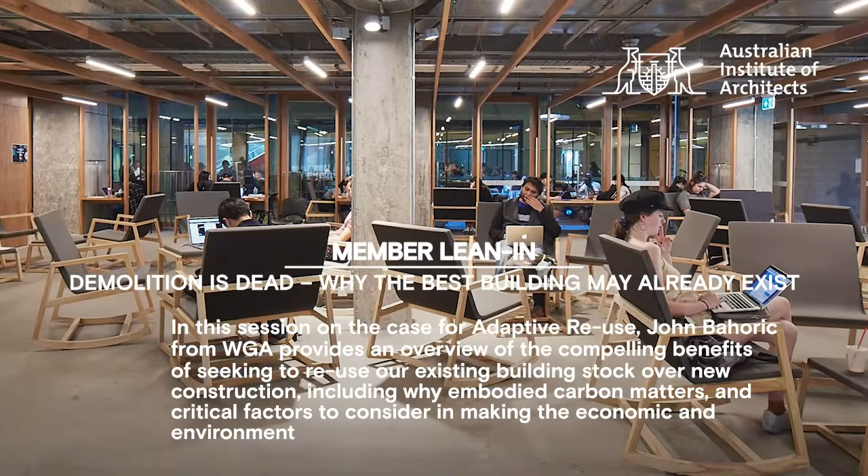This session will provide an overview of the compelling benefits of seeking to reuse our existing building stock over new construction, including why embodied carbon matters and critical factors to consider in making the economic and environmental case for adaptive reuse. My name is Stephanie Bullock, and I'm from Kosloff Architecture and sit on the Institute's Victorian Chapter Council, and it's my honour to be your host and moderator for today's lean-in session.

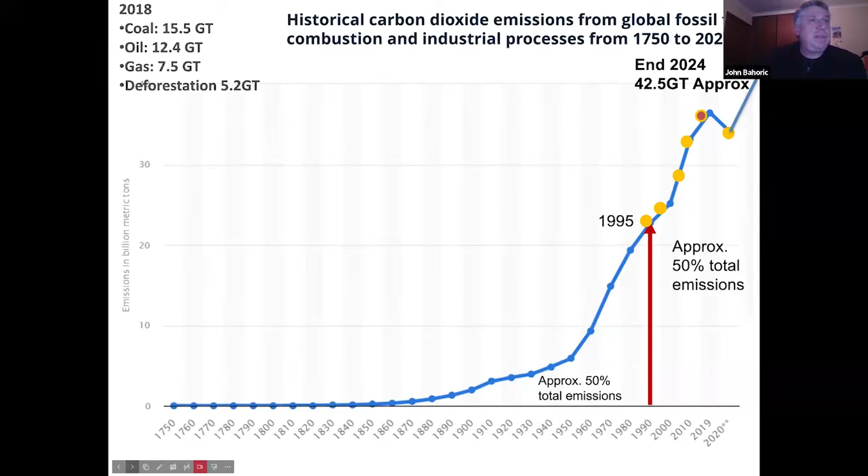Yep, just keep on going. That's it. Next slide.

The reason why we're here talking about this is because if you look at global CO2 emissions, buildings make up about 39% of emissions, together with transportation about 23%. In the building sector, we're responsible for about 39% of emissions, about a quarter of which is attributable to embodied carbon, about 11%. So the decisions we make as designers are very critical in our ability to influence and reduce both operational and, in particular moving forward as we decarbonise the grid, embodied carbon.

There's a couple of other points that tie together neatly which we should be cognizant of. Resources will become difficult to extract. It's predicted that we'll have a resource shortage as our building stock effectively doubles in the next 40 years, and the cost of resources will concurrently increase with material demand, which will outstrip supply. And as we decarbonise the grid, as solar panels and wind take over from coal, it'll be increasingly embodied carbon that becomes most heavily scrutinised.

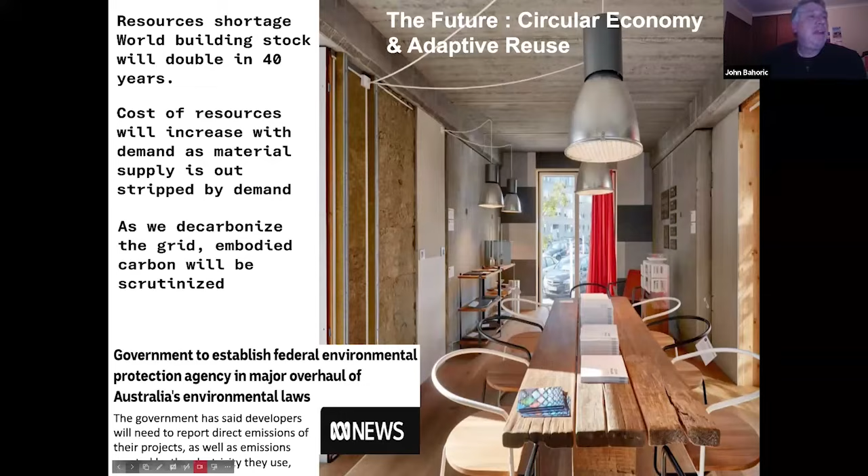If we compare that to France, for example, France have passed a new law that compels developers or builders to effectively have at least 50% of their materiality be regenerative, which basically points to timber as being a major material component for use moving forward through French building stock. So there are definitely compliance requirements now being increasingly implemented across the world, which recognise the dire situation that we're in.

When we talk about emissions, I thought it would be useful to talk about some definitions first. The common language is Scope 1, Scope 2, Scope 3. Scope 1 refers to direct emissions from on-site fuel combustion, gas turbines, machinery, vehicles. Scope 2 refers effectively to electricity, heat, or steam that you buy from the grid. So when we talk about removing Scope 2 emissions, we're effectively talking about decarbonising the grid and shutting down coal-fired power stations, replacing those with wind, solar, or other green sources of power.

Scope 3, and this is what the planning laws will target, refers to products that you buy. It refers to your business travel, when you're on aircraft or aeroplane travel. It also refers to the materials that come out of the ground that are processed, refined, and purchased, including fuel. That forms essentially the embodied carbon that goes into your building. So Scope 3 is essentially the next big component that's being targeted.

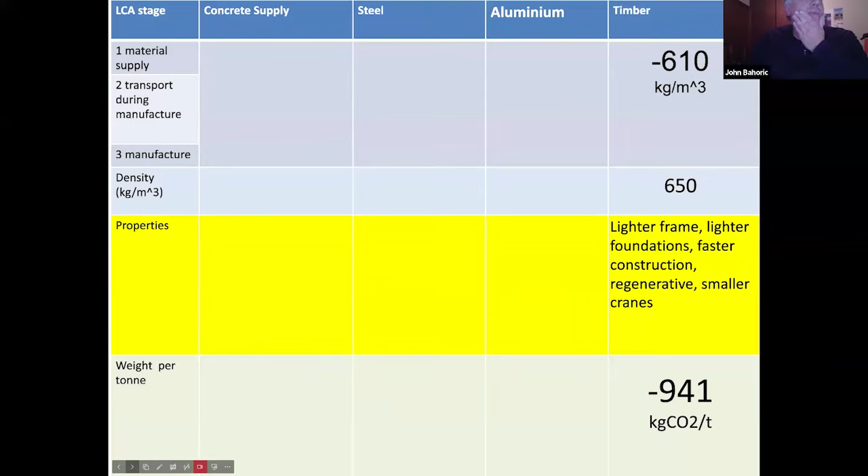Now let's compare that to concrete. Concrete releases 410, for a standard mix, 32 MPa—referred to as the Australian National Life Cycle Inventory Mix, a benchmark. That releases 410 kilograms of CO2 per cubic meter, almost exclusively and entirely in the production of cement. When we produce cement, constituent particles get heated to about 1,500 degrees, and that's where all the energy is released in its production.

Flipping that around, weight per ton, it's about 171 kilograms of CO2 per ton, which isn't too bad, except we use concrete on foundations, floors, columns, beams. It tends to add up because it's omnipresent.

So let's compare that to steel. Steel is horrifically high. If you look at the bottom and compare it to concrete, for every ton of steel we produce, we release 3.2 tons of CO2. That's because steel has to be heated in a blast furnace to about 4,000 to 4,500 degrees centigrade, and that's where all the energy is consumed.

Even recycled steel has to go back into an arc furnace, also up at about 3,500 to 4,000 degrees. The difference between recycled steel and steel that comes out of the ground is essentially that you're removing the mining processes, but it's still very carbon intensive. So using recycled steel isn't necessarily saving the world, unfortunately.

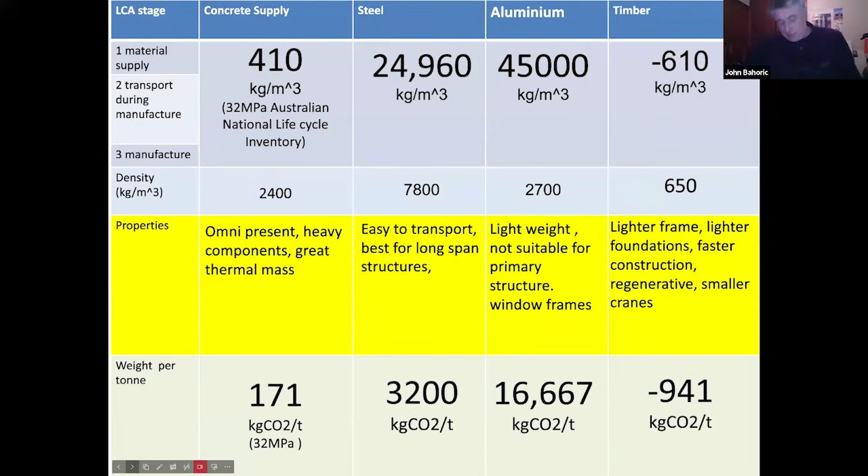Now I want to compare that to some other finished materials you might use. For example, glass is about 1.1 tons of CO2 released per ton of glass produced, and plasterboard is about 169 kilograms of CO2 per ton. It's not too bad, but these materials tend to be used more often as fit-out and become omnipresent.

Compare that to terrazzo tiles, which from memory is 80 kilograms of CO2 per square meter. And the last one is vinyl carpets, which is about 11 kilograms per square meter. So obviously the figures get smaller as the materiality and end use becomes less structural.

But it's more about being cognizant of how often you're using it and how often the cycle of refurbishment and fit-out occurs.

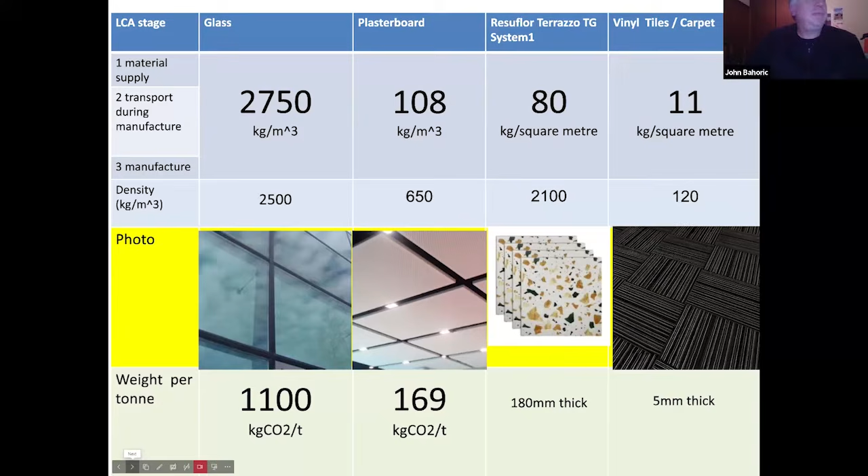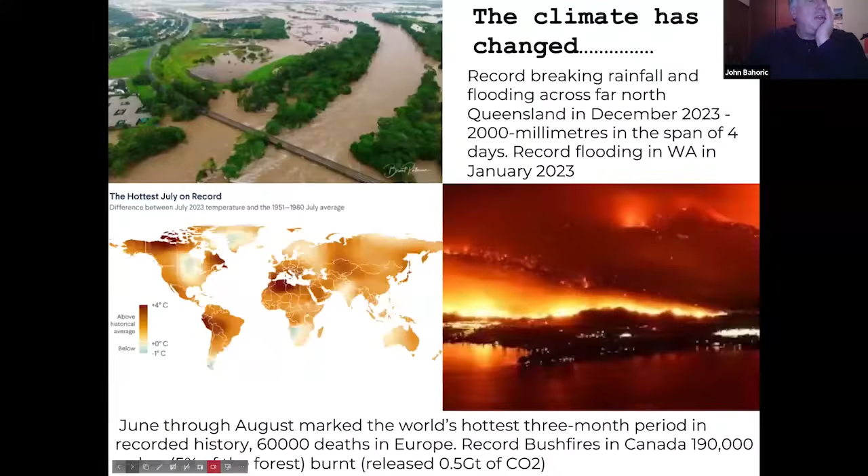Ballarat Biennale building is a 150-year-old building that was essentially a bank. It was the location where gold from Ballarat was brought in and exchanged for money. That meant the building was very resilient and strong. The floors had foundries where gold was melted and ingots created, so we were dealing with robust floors—220 deep, 240 deep joists, 60 wide—giving a floor capacity of about 5 kPa, which is incredibly good.

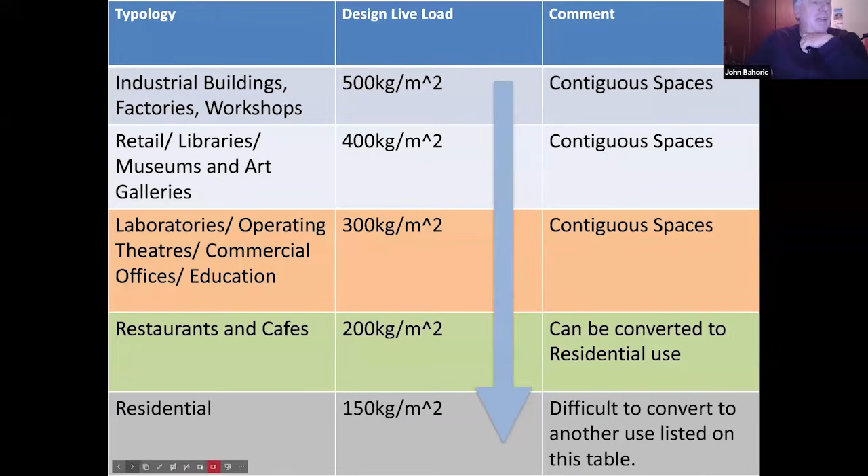For some of the existing long span structures, we had wrought iron girders that were riveted, creating column-free or wall-free spaces. That gave us something interesting to work with in terms of a building that could be fairly readily adapted to a gallery.

Of interest as well were the bluestone foundations. It was difficult to strengthen those to get them up to current earthquake code requirements, so we sought dispensation in that regard.

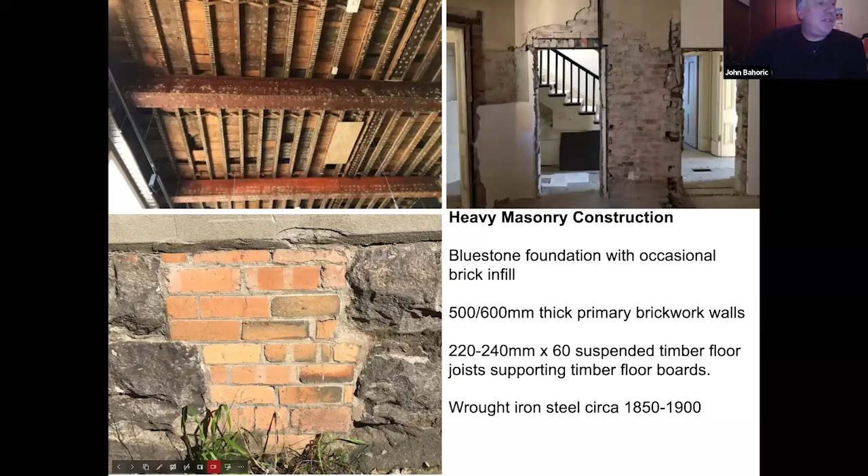This shows essentially what we were dealing with in terms of the composition of the walls. We've got effectively limestone mortar holding together brickwork that was also held by a one centimetre thick, or thereabouts, limestone render. Together, the whole assembly was quite strong, and it gave the building and the walls a lot of resilience.

But the issue was, before we got there, some of the demolition crew were ahead of themselves. They started ripping out wiring, which then ripped out some of the mortar, which meant the walls were damaged, reducing the performance of some of the conditions. So it's always good to figure out what you've got before you go in and start changing things too quickly.

The important thing about these walls and this materiality was that you always need to use like-for-like materials, or materials that are compatible, when you're strengthening. So you need to be cognizant of what you've got before you specify your new materials.

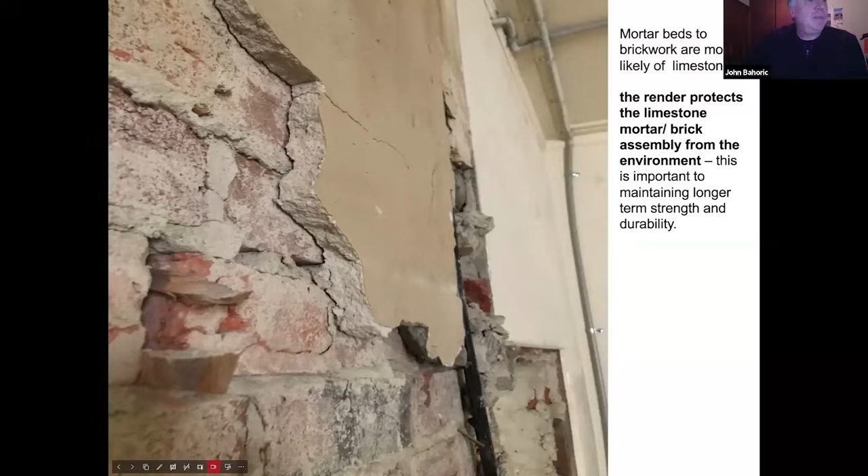A common challenge is the chimneys on older buildings. These chimneys were connected to the foundries used to melt the gold. They're tall limestone concrete structures, very lightly reinforced, and they'll probably be the first thing that comes down in an earthquake. It's always a challenge to reinforce these from the inside and sometimes from the outside, noting you need to meet heritage requirements where there's an overlay. But generally the balustrades and chimneys are the first to go during an earthquake.

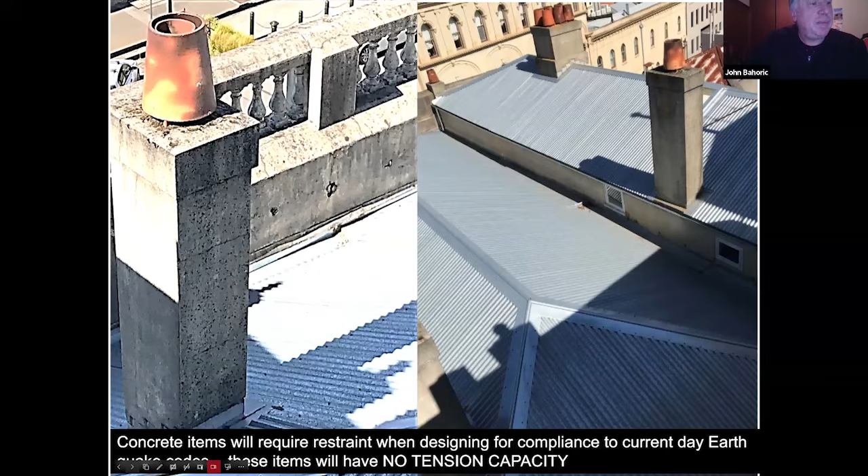The next project I wanted to go through very quickly is RMIT New Academic Street. This was a truly great example of the best building being the one that's already built. It's a fantastic example of getting the most out of a challenging existing build and then augmenting that with an appropriate scale and form of new build.

In very quick summary, 32,000 square meters of new and refurbished space. A highlight for me were the new east-west laneways, which also created shopfront spaces, and most importantly linked Swanston Street effectively to Bowen Street. They provided a fantastic level of transparency through the building, making it a lot easier to navigate through all these spaces. It was a very successful and smart use of interesting interventions.

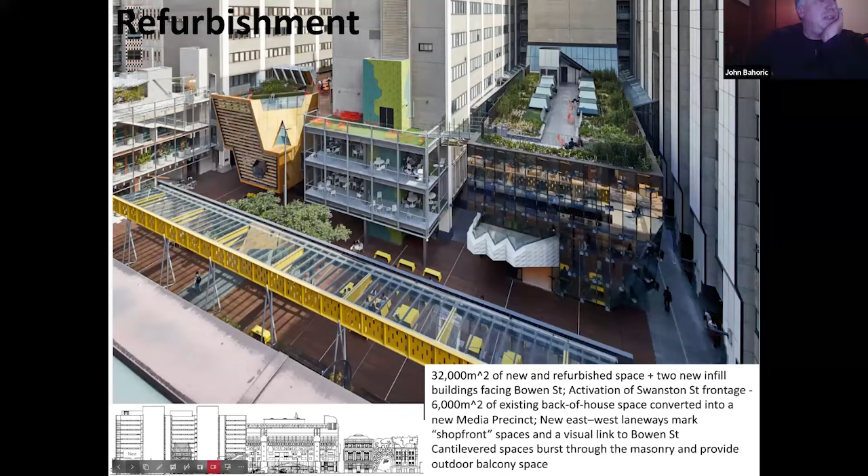These buildings were fully welded frames, a bit like what I discussed earlier. We had to break out a lot of the connections to make sure that what we saw in some older drawings is what we had, and by and large it was there. This meant all the holes punched through the slabs were done between the steel beams, so we had to maintain the connections between steel beams, because those connections to the floors provide not only vertical stability but also horizontal stability under sway action, under wind and earthquake.

Together with figuring out how resilient the building was under earthquake loads, we sought at the front end of the project a pathway with building surveyors as to how to achieve resilience under earthquake loads, and also sought dispensation where required.

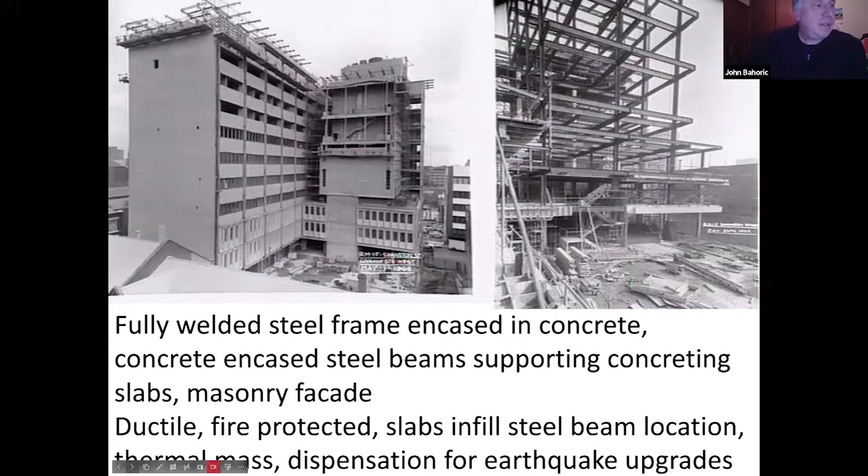A key part of it was converting the older version of those buildings which were inward looking, with limited connectivity to Swanston Street, a bit confusing when you're inside, a bit dark. I remember chatting to Rob Adams, who was quite pleasantly surprised at how the right interventions created such a big change to the building's user-friendliness, and how the puncture points and balconies created opportunities for more floor space, more natural light, and made the three buildings work together more interestingly.

There's a lot more natural daylighting, improved ventilation, and far better outcomes around vertical and horizontal circulation. The next couple of slides demonstrate the benefits of creating the right interventions between our existing steel beams, preserving concrete in some cases and removing it in others. The concrete provides fire protection to the beams, helping meet BCA requirements. It was a labour of love determining the combination of areas that could be punched through for the best architectural and structural outcomes.

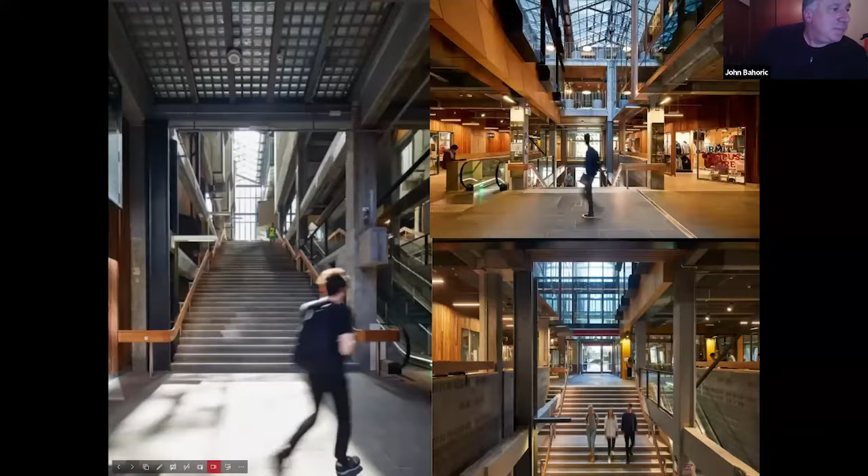One of the buildings I want to focus on, as a quick case study, is the Garden Building on New Academic Street. It sits adjacent to an underground car park, and it demonstrates the effectiveness of using the right material for such projects. The material was almost exclusively timber with steel fitted around the facade. The timber came from Australian Sustainable Hardwoods in Gippsland.

It was a stick frame building—you can see the bracing at the bottom, expressed bracing, which means it's easy to erect and disassemble. This building took Lendlease... it was constructed in very, very quick time.

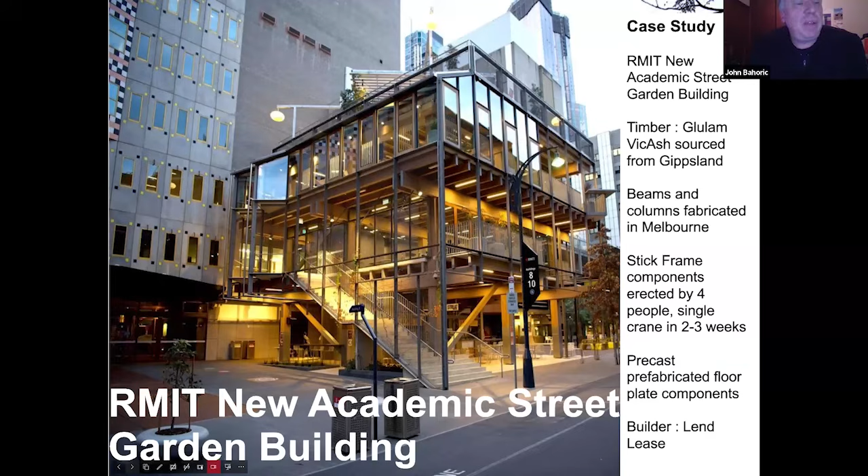Some of the benefits of timber: it's sustainable as long as forests are regenerated, so forest management is key. It's the only construction material that sequesters carbon. It has an important story to tell around biophilia and the resultant improvements to health and well-being for end users of the building.

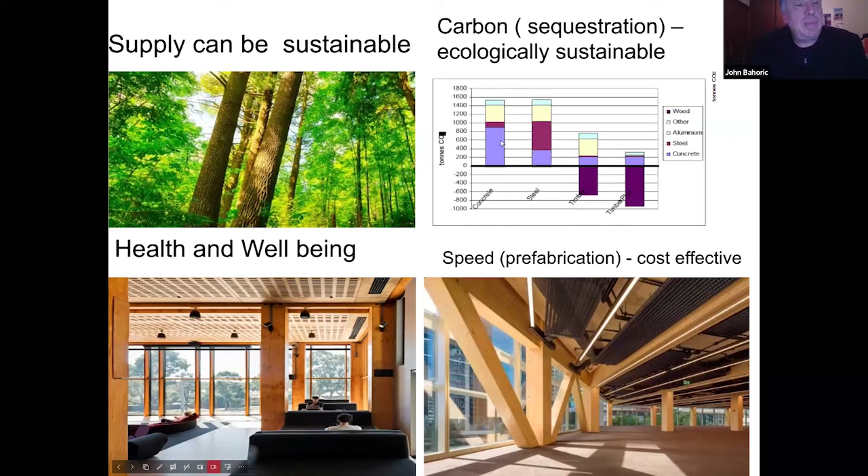It's very easy to use, cut, and adjust on site, so it contributes to speed in fabrication and prefabrication, making it cost effective. It works very well with digital environments, where you send files off overseas and come back with a Meccano set full of pieces in a container that enables you to put your building up.

In this case, the Vic Ash, which is a weaker hardwood, had protection provided with a polyurethane coating. There were pedestals used to lift the timber off the ground to preserve it against water damage and infestation from termites.

The pieces were brought out as long double-height pieces, which minimized our connections on site. We could do that because timber is very light, so you don't need big craneage requirements to lift it in place, making it more maneuverable on site and quicker to build.

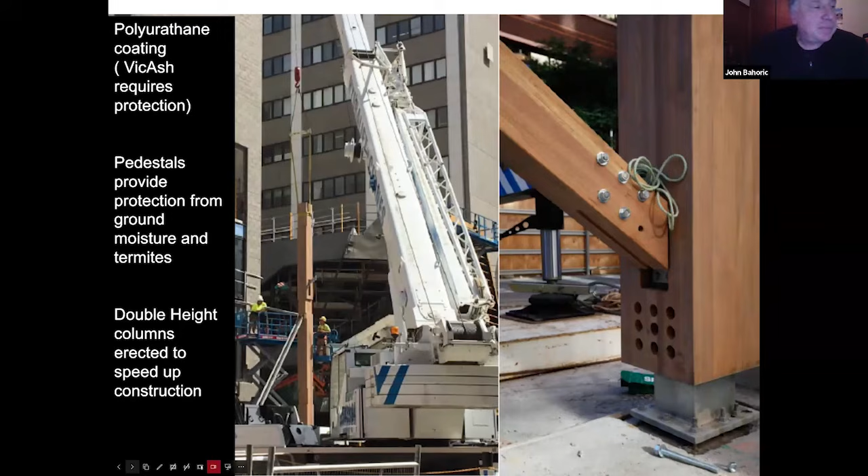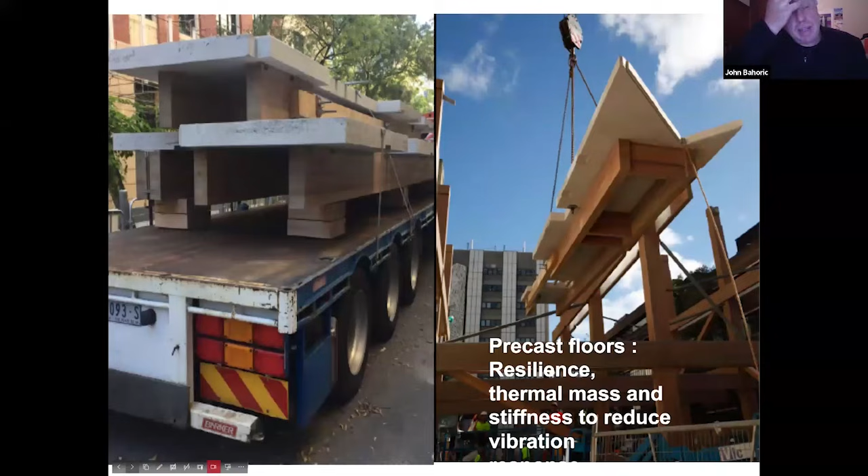The floor system that came with it was essentially prefabricated concrete panels fitted to the timber beams, lifted off the back of a truck, joined and plonked onto primary beams on site, then plate connected—as you can see through the recesses—allowing the plates to keep all the pieces together, acting as one big diaphragm.

The benefits of timber around new build and adaptive reuse are immense. You get lighter foundations, meaning when adding timber to an existing build, you've got a better chance of getting more floors on there working with the residual capacity you've got. Lighter craneage, faster installation, lower earthquake forces—I'll go into that on the next slide. It's cost-effective, time-effective, and the quality of finish is better.

Timber has the best strength-to-weight ratio of all materials. Steel can span longer, concrete has its purpose around floor plates and resilient foundations, but timber has a sweet spot for mid-rise buildings between 2 and 8 stories, where it's incredibly economical and easy to use.

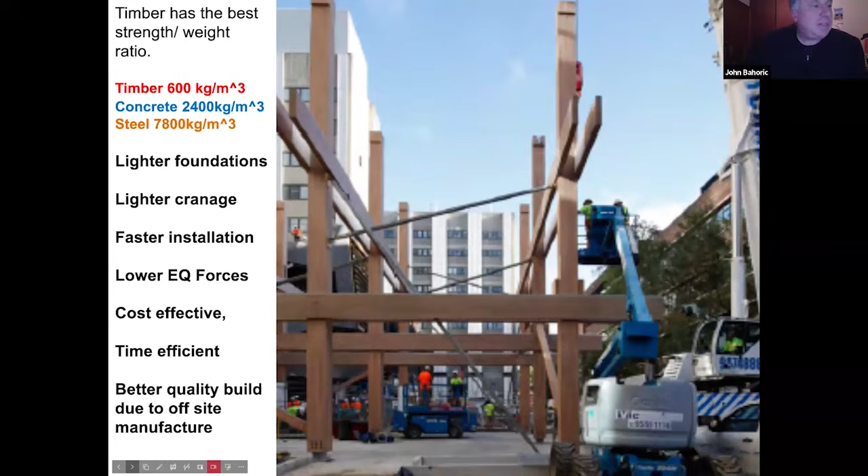This was a project we looked at a few years ago, 99 Queen Street, an existing building. There's a structural model on the left. We were limited by the amount of floors we could put up as a result of gravity and earthquake loads.

Putting earthquake loads compels you, when you do an analysis, to redistribute the loads so that you get more load at the top and fewer at the bottom. It's almost like a pendulum effect.

On the left-hand side, the blue triangle, we could only add 3 additional concrete floors, beyond which the earthquake loads became very high. On the right-hand side, using timber, shown in yellow, because it's lighter you get less mass moving. We ended up going with 6 floors instead of 3, achieving lower loads and an easier pathway to compliance. So there's a compelling case for using timber to get more floor space in adaptively reused buildings.

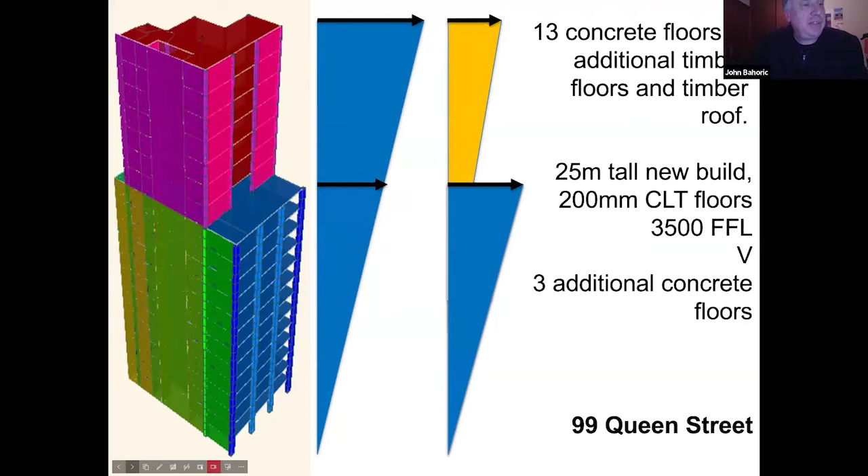Some tips around approaches to extensions or better ways of design: in our carbon sensitive environment, it's always good to design for disassembly. That means creating sticks effectively, using simple bolted connections, and trying to use cross bracing rather than moment frames, because cross bracing uses lighter connections that are easy to construct on site and easy to deconstruct. So all these components can be reused somewhere else down the track, and I've got another slide that demonstrates that.

There's also a compelling case to do more with less, to remove layers between primary structure and facade, for example, and use the primary structure as support for the facade. The new Green Star rewards you for removing what they deem unnecessary layers and using members for dual purposes to avoid secondary structure where possible, which also helps remove building clutter.

In terms of the case for adaptive reuse and looking at building condition, although the concrete might be degraded, there may be a case for concrete cylinder tests to determine strength, condition, and any rehabilitation work needed. The steel doesn't typically degrade the way concrete does, although rust is an issue. If your concrete strength decreases by 50%, it doesn't mean your floor plate capacity decreases by 50%, because the steel is the same strength. Bond is important, it just means your structure becomes increasingly more brittle. As long as it complies with codes, you can still use that concrete safely, but you need the right engineering approach to reach that determination.

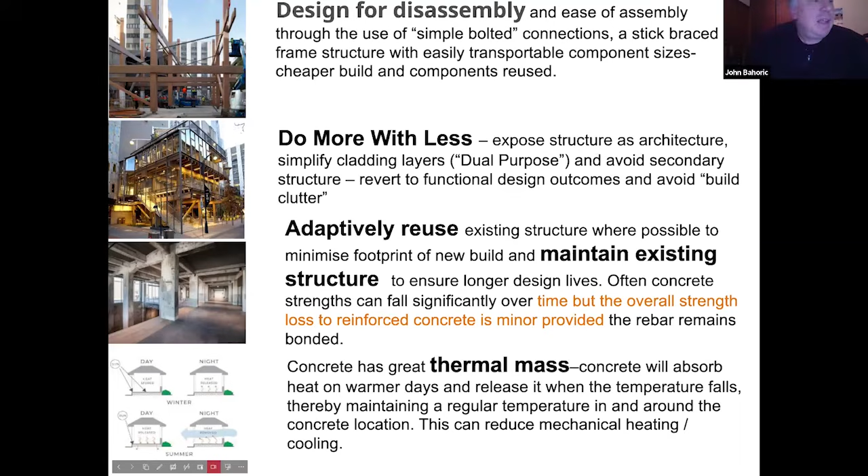Just to demonstrate how timber and stick frames are versatile, this is the International House building in Sydney. The columns on the left-hand side along the colonnade, sitting on concrete pedestals, came from a bridge that was 87 years old, built in 1935. The columns were taken from the disused, decommissioned bridge, joined together in clumps of 4, bolted together. The timber was regraded and reviewed to ensure it was still structurally okay, and it's now made its way into another building for another 100+ years.

The point being that with the right species and the right approach to design, there's no reason these components can't continue to have a life through the circular economy and end up in different buildings through the evolution of the built environment.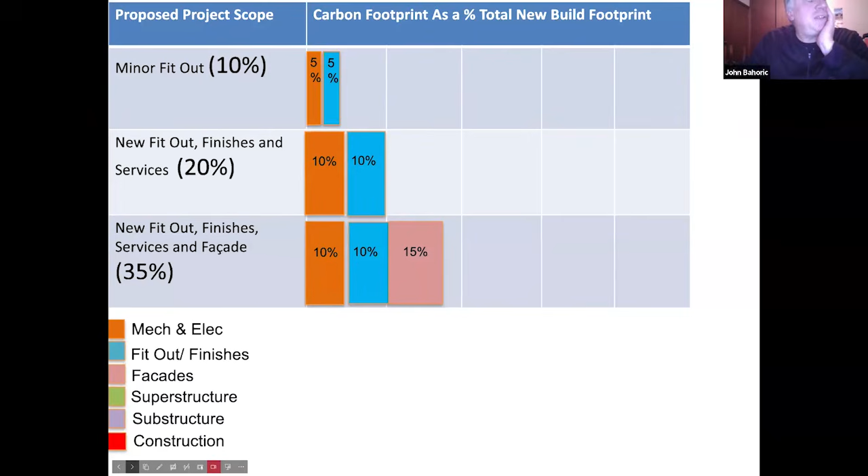So we just might have to click through this. If you're doing minor fit outs, the expectation is that your footprint's about 10% of a new building. If you're doing major fit out with services, that's approximately twice as onerous as minor fit outs. And if you then start to look at your facade, which adds another 15%, then you're up to about 35%. So a major fit out with a new facade is about 65% better in terms of CO2 footprint compared to a new build.

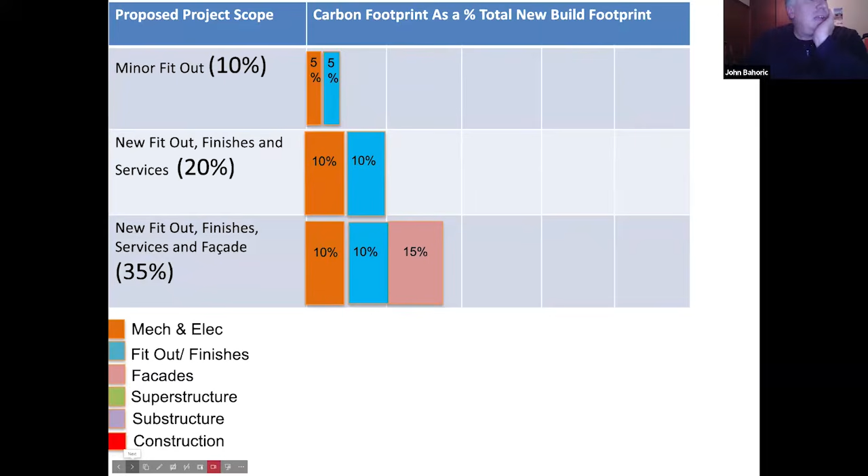So next click. Essentially, those are the five broader decisions you've got to make when it comes to looking at your existing building. It's good to be cognizant of the effect your decisions are having on how materials are being used or not used, and where they end up, whether it be landfill or otherwise.

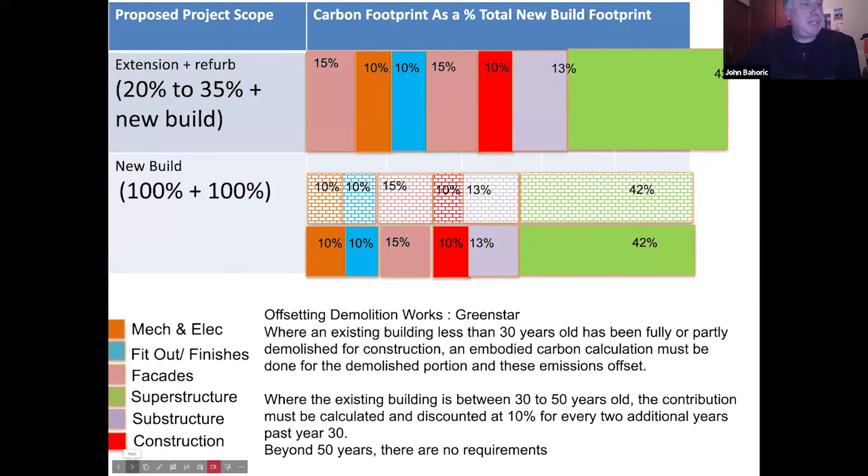And that's my last slide, and that brings my presentation to an end. Sorry about some of the technical issues - it wasn't the way we planned it, but I hope the information got through, and I'm very happy to answer questions. I hope there was something in there for everyone, just inspiring you to read a bit further, to become a bit more educated and a bit more capable of taking on your next project with a carbon-friendly outcome in mind.